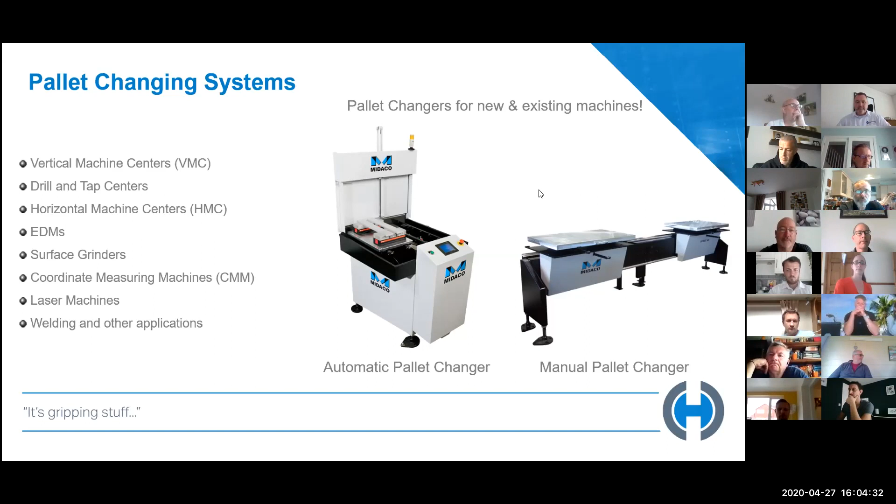So the manual pallet changers: you'd have sort of 2 pallets at the front of the machine. I'm going to play a little video in a second anyway, and they're basically on a system that is like a track, and you basically bring one across on these rails, put it in your machine. When that one's done, back out the machine, and then you can bring your other one in from the other side and get that in.

The bridge that you can see on the bottom left of the picture is sort of dependent on the machine really, but we offer these if the coolant tank's at the front and it needs to be accessible, and also if sometimes the control panel's at the front of the machine as well, which swings out and stuff like that. In other cases where it might be at the back of the machine or whatever, then the pallet changer can go right up to the front of the machine.

So which is a little bit like on this video, which I'm just going to play briefly just to show you how it works.

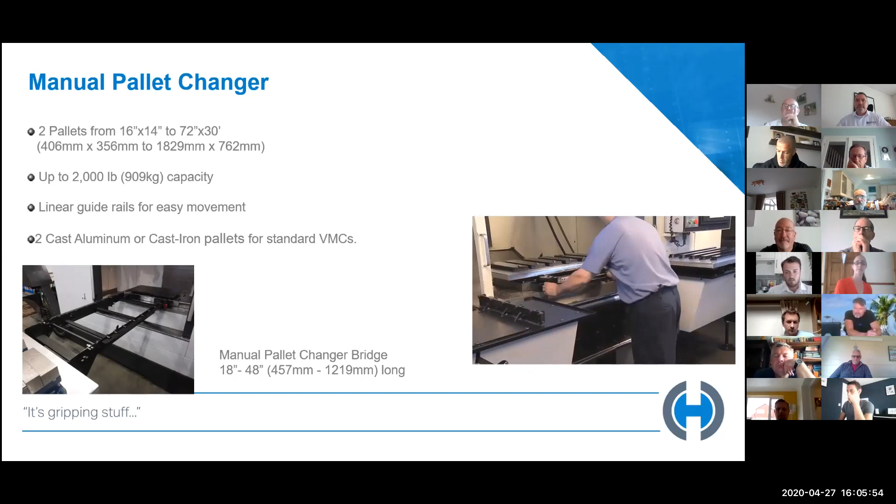So as discussed, that's it, where it clamps onto the receiver plate. The pallet comes out across to one side, and then you'd obviously have your parts loaded up on your next pallet, across in front of the machine, back in, and you'll see the receiver plate clamp down, and it all works pneumatically. With the pneumatics as well, there is a blow-off system, which basically takes the swarf out of critical areas from around the pallet.

The pallets are available in aluminium, or you can upgrade to cast iron pallets as well.

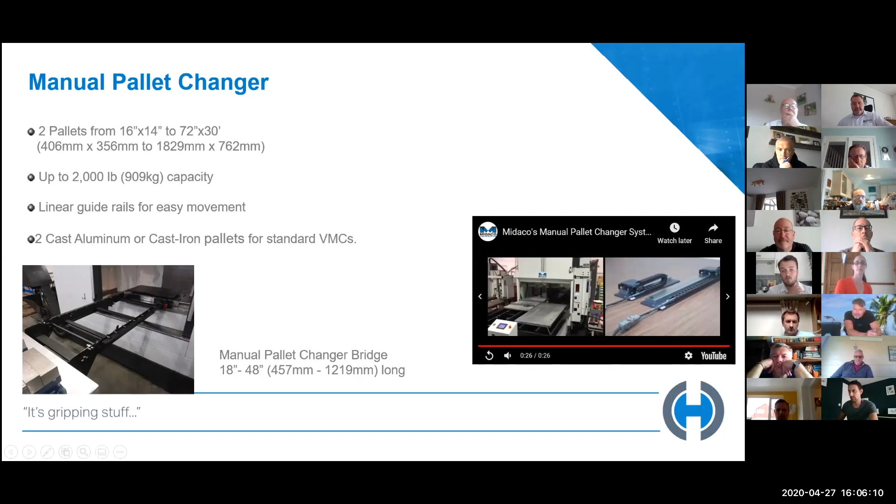Some of the benefits: the pneumatic receiver clamps down automatically for you, so there's no messing about with that. There's a pallet confirmation switch, which works in line with the door to ensure that's all working safely. You've got 2 buttons to clamp, which you see briefly on that picture - you might have seen the guy do it when he put it in the machine there. There are 2 red buttons, which when you've got the pallet on, you press those, and that's what clamps it down, ensuring for safety that your hands are out of the way, so they're not stuck under the pallet. Whereas some of the other options available in the market are mechanical, and you've still got that risk of something like that happening, so that's something Midaco have sort of seen ahead and put that feature in there.

Reducing spindle downtime is the biggest thing for us. What sort of drives the pallet changes - obviously on a manual setup you're loading your parts up whilst your machine's running, and then you've got a straight changeover.

Ergonomics, massive advantage. You've got operators complaining about putting parts in and out of the machine, back strains, arm strains, moving things in and out, whereas here you can pretty much load straight onto your pallet and you're just in and out on the rails, making it a lot easier.

You're looking at roughly a minute to pallet change, can be considerably less, as you've seen on the video. That had nothing on the pallets, so it was quite light to shift about. Some heavier stuff might be more like around a minute, which is still a pretty quick changeover time.

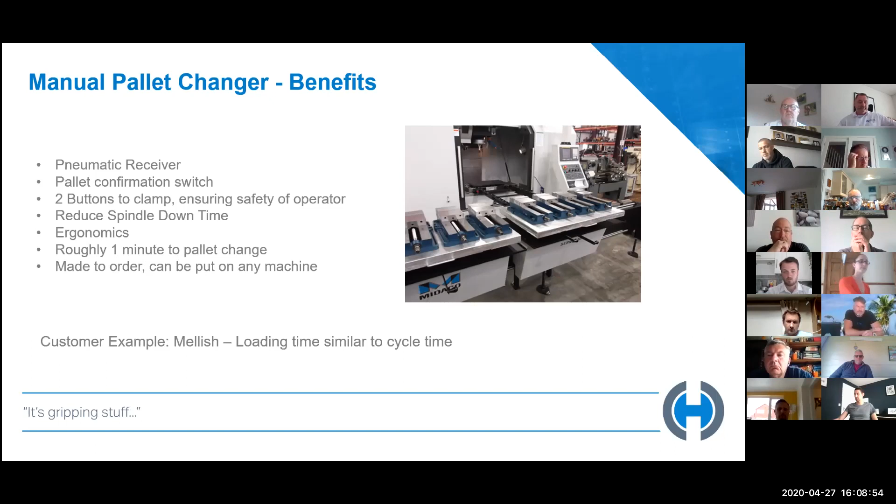Automatic pallet changes - so going for the more auto route, similar sort of setup again. There you've got your 2 pallets on there.

With this setup, you've got one pallet that will go in there and it's doing it automatically rather than a guy stood at the machine, so that guy can do his loading and walk away from the machine. One will go in to the machine while one's loaded up, and as soon as that one comes back out, you've got a much quicker process.

It works on a Y-axis shift, so within the machine the receiver plate will move backwards and forwards, and it'll take in the pallet from the back, then you can move down to the front. The pallets are available in aluminium or cast iron, and the weight capacity is pretty high on that one, around 227 kilos, as you can see.

I'll just play a little video again to show this. It's got a bit of talking in it - I'll probably just mute it down because it's a bit slow on here when it's talking. Just to show you a bit more of an overview of what happens.

We do all the work holding on these, as you can see. There are some vices, not ours, but that's something else we can offer along with the pallet changes as well.

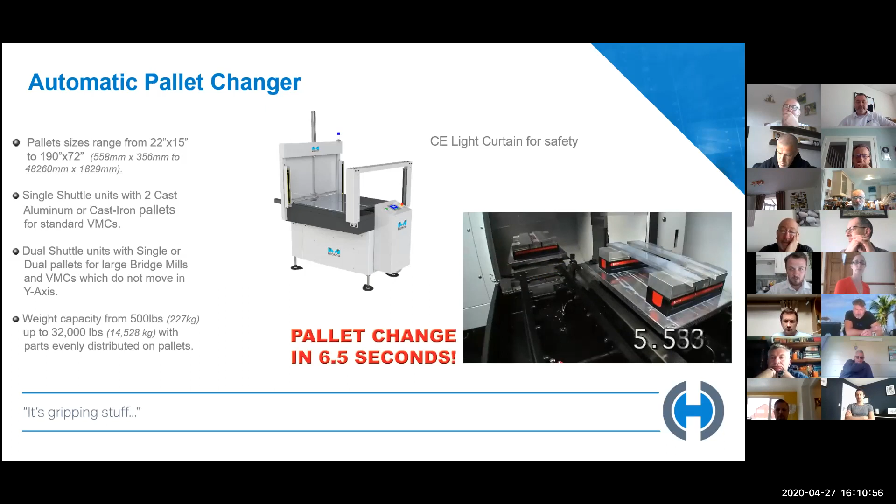We've had a lot of success with these ones, and a few successful customers. We've had them both manual and automatic. I'm just going to stop that because it plays the manual one again.

Some of the benefits - again, all pneumatic receivers, so pretty quick when it's in and out. You've seen when it goes in there, it clamps down exactly the same way, but automatically. Again, it's all about reducing your spindle downtime. Ergonomics, again.

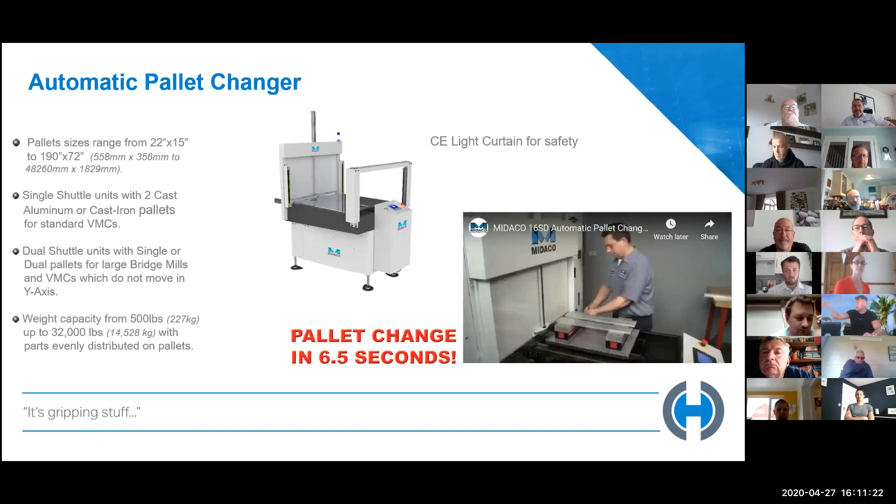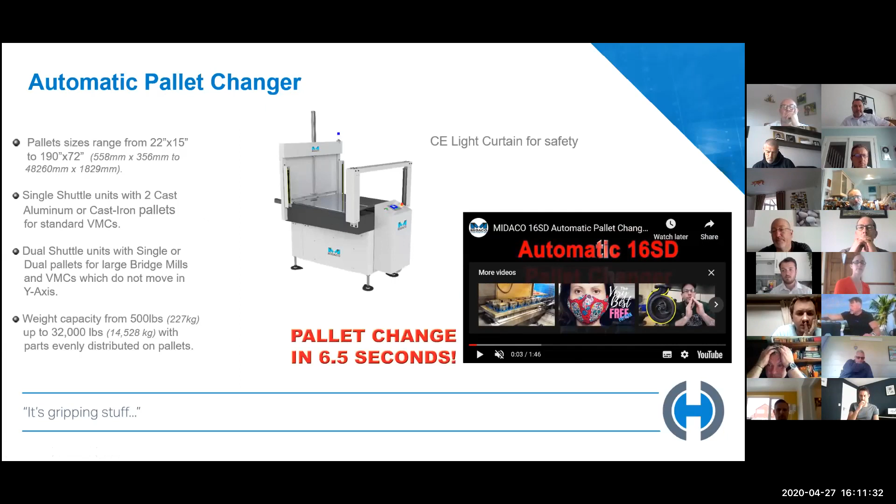Something I didn't mention is the CE light curtain as well, which basically allows the doors to move up and down and the pallets to move as long as nobody's in the way, so just a safety benefit. They used to have doors on the sides, and Midaco still offer that, but as more of a standard thing we went for the CE light curtain because the doors were getting in the way. So the light curtain is a better option, and it's all up to CE markings now.

So depending on your model and size, 6.5 seconds to pallet change. Obviously that was quite a light pallet that was in there, but you can see probably nothing more than sort of 10 seconds to change over.

Again, made to order, and as I mentioned earlier, it allows your operator, once he's got that loaded up and gets his next pallet ready, to go off and work on another machine. Hopefully you've got an operator working across two or three machines then, so a lot of companies like that idea.

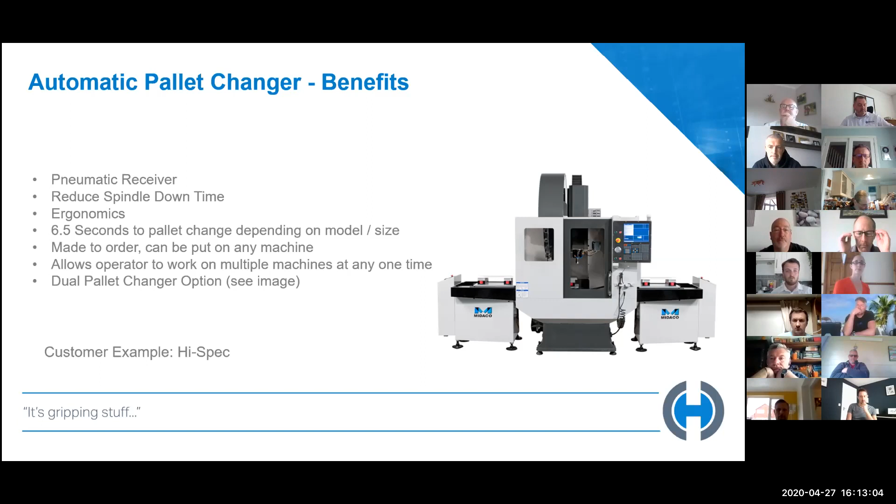Something else they offer on the pallet changers now, the Midaco trunnion system. So customers with fourth axis - this can be done new, and I think you can also adapt it onto existing machines. You just need one 4th axis unit that stays in your machine, and then you'd have the 2 front ends on your pallets as the trunnions.

And then again, you'd be loading up your 4th axis parts on the pallet outside the machine. It might be that you want to do both sides of the pallet, or it might be particular 4th axis work requirements. But you see the quick changeovers again there - it's pretty much just in and out. So that one's gone out, that one's in, and then again you can start working on your next trunnion outside the machine.

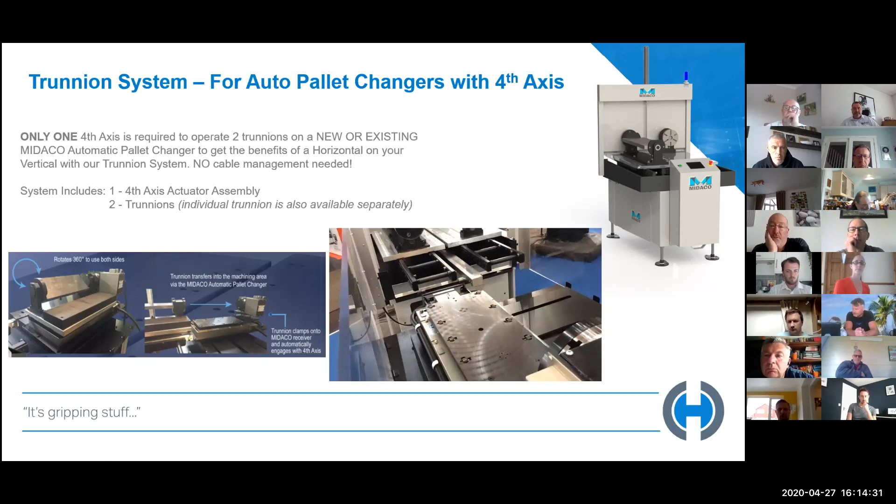So plenty of room to get your devices on there or whatever fixtures you want, stuff like that. That's all equipped with Mitsubishi controls, and it's integrated into the machine with macros working to load the pallets in and out, along with the program to do the machining. The way it works is the receiver's on 2 prongs, a bit like a forklift if you like, off a much smaller version. It takes the pallets off, brings them in, a bit like a pull stud, then clamps it down in the machine, works on that, and works its way around.

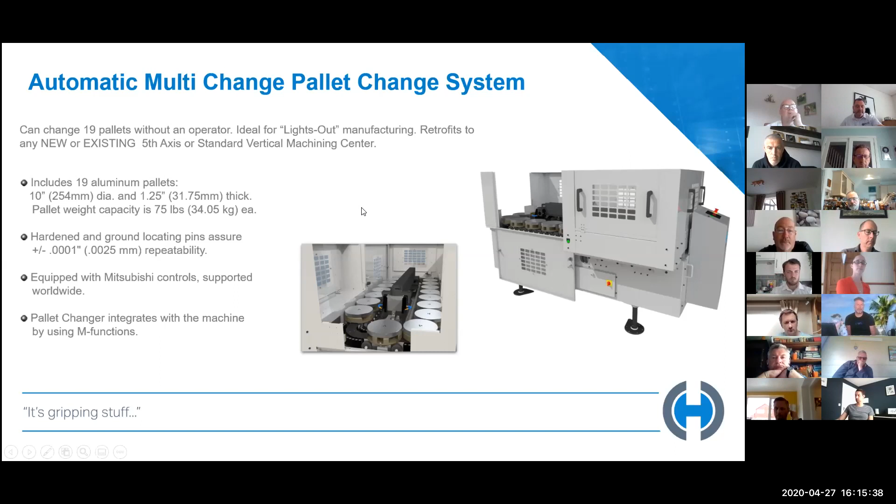A little bit more of an image there to see how it does it - servo driven, with the pallets going around the machine. You can see the cast iron receiver directly on the table of the machine, and that's where the pallets come in and get clamped down. And again, there's the dual air blast, just taking the swarf and stuff like that after machining out of critical areas.

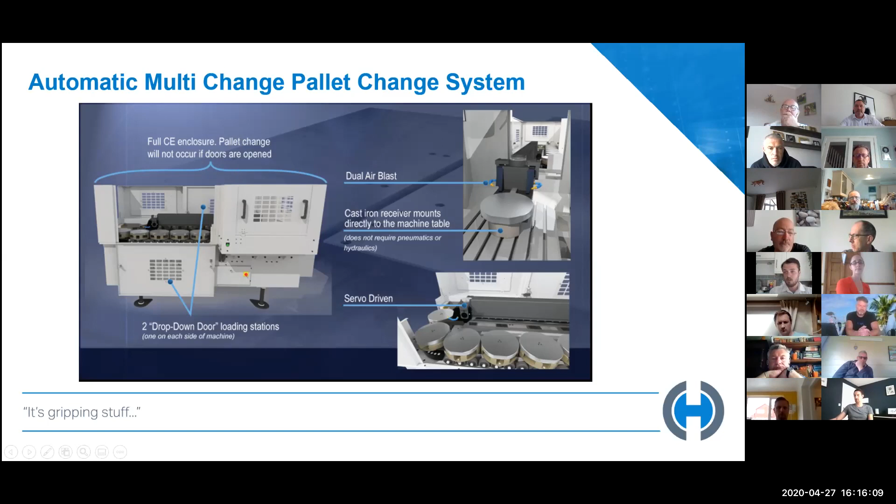Again, that's all CE marked with the enclosures. So basically, if those doors aren't shut, then nothing will happen - it's all fully safe.

Something else Midaco are offering - this isn't something we've got into as much as the standard pallet changes, but they are now offering a robot arm on the automatics as well. The pallet changes are semi-automation on the machine; now this allows them to become fully automated. It's universal across machines, so it will be made to order, where this robot arm had gone to specific pallet changes, and it goes up to about 10 kilos it can pick up at the moment. Whether they upsize that, I'm not sure, but that's where they've got to at the minute.

I'll just play a quick video of that to show you - pretty sure you'll get the idea, but it's again one way. You can have the stuff there loaded up and walk away from the machine. Obviously this is just lifting it up and down, but on a normal day it would be picking them up from other areas, with all your parts ready on that pallet.

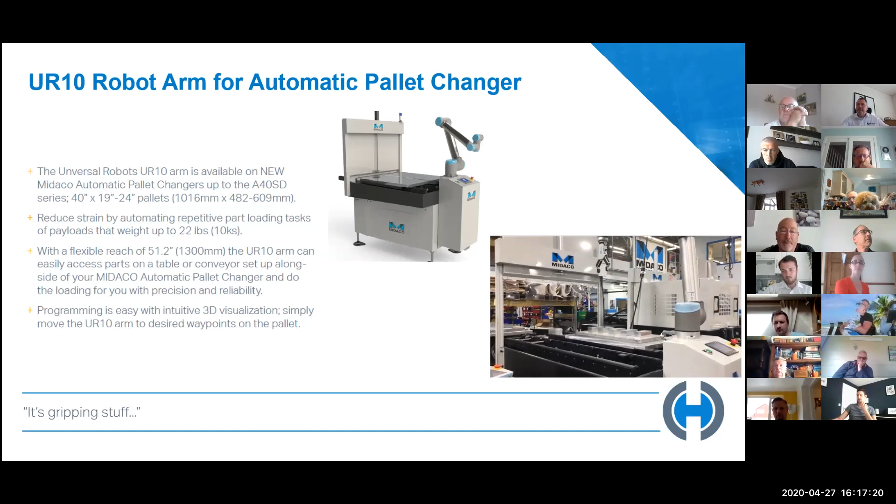And then just sort of see what happens. Similar scenario here, where basically the pallet shift inside the machine moves with the receiver, takes one pallet out across to the other side and brings that pallet in ready for work, and then the robot will take those parts off and get reloaded again.

So when that door's down, it starts removing again. Not going to make you sit and watch all that, it's just lifting up and down.

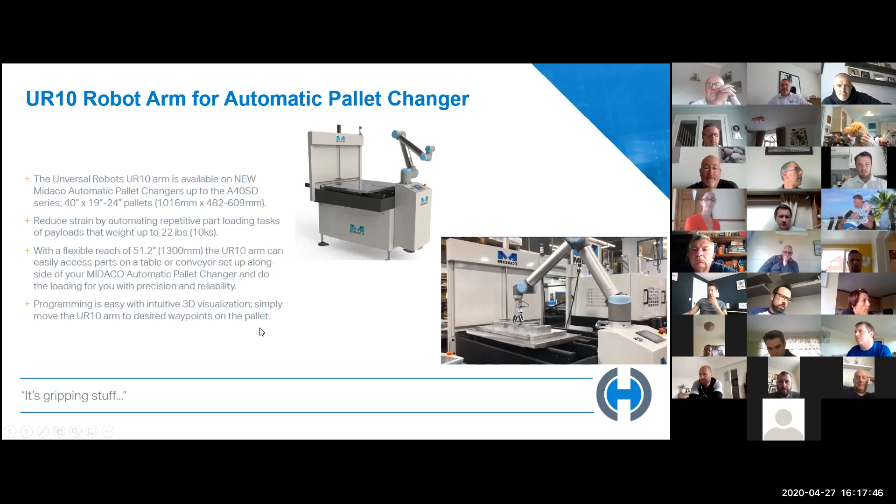And just one further thing that they offer as well, an automatic door opening system. Again, all for automation and ergonomics, so you're not pushing that door open and closed all the time. These go on both mills and lathes, plus other machinery, as mentioned earlier with the pallet changes.

Ideal again for the robot we've just seen, and the automatic pallet changes - it's just another way of automating it to get parts in and out. It's used on both double and single doors, so really versatile across all sorts of machines.

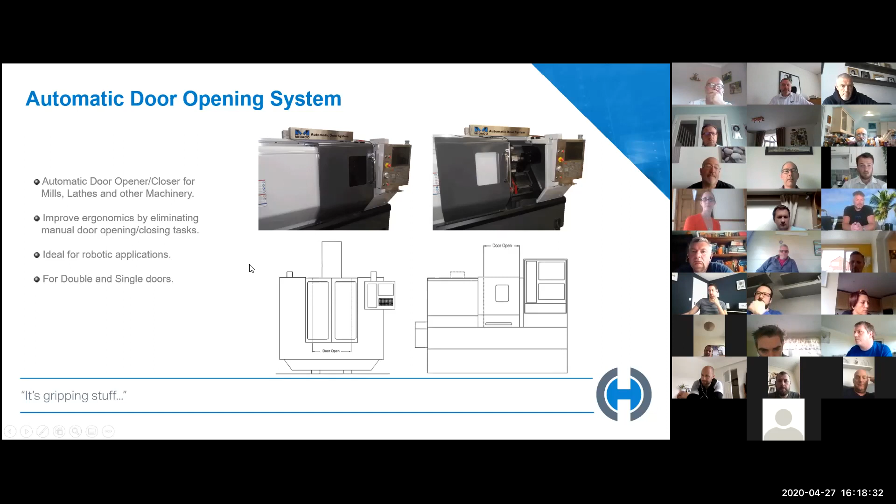Hopefully that gives you a bit of an overview so you can see the benefits of driving that. Midaco with the automation routes is about bringing the downtime to the spindle down, keeping the machine running basically - that's where they're going with it. And obviously from that you get a return on investment, more productivity through your workshop.

I think a lot of people visualise these as being all high production - it's not necessarily. Someone like Mellish, who I mentioned earlier, they've got big parts that are more awkward to load up, so that's why the load times are so long. Even them, not massively putting loads of parts through the machine, it still helps because while that machine's running, they get the other pallet loaded up - that's where it benefits them mostly. They had a payback in under 18 months on that unit as well. So thanks for being on, everyone, any questions?

Very good, Rob. I've got one to start with. That Mellish Engineering, is that the company that was raving about it on MTD?